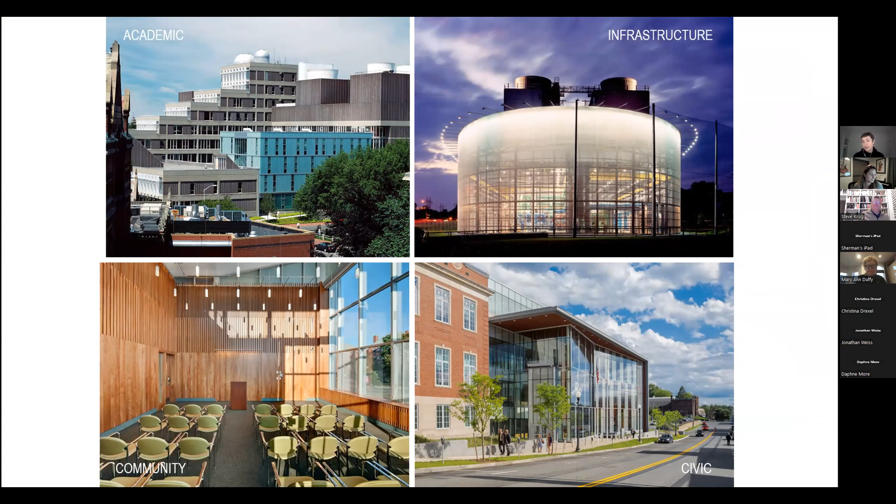I may be preaching to the choir here, but I wanted to go through a brief introduction of why wood, why it matters, and what it does for all of us. You are probably very familiar with this slide, but we know that between building operations and building construction, the building sector is responsible for 40% of our overall energy use.

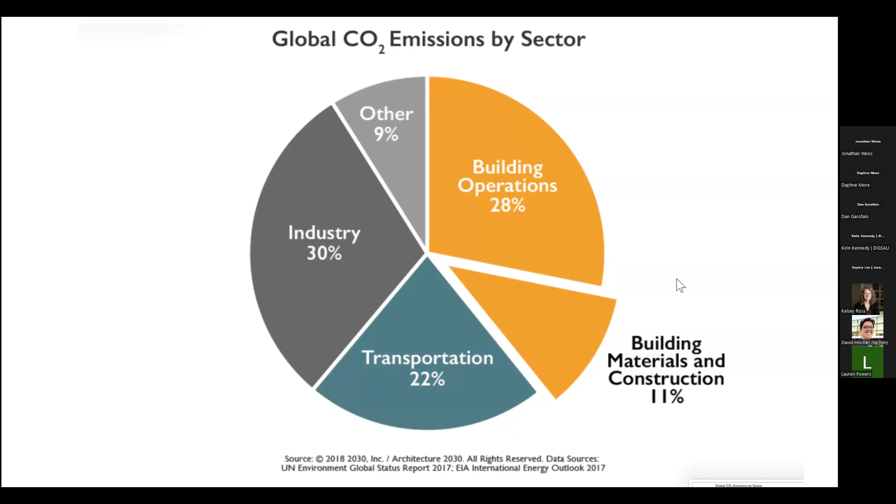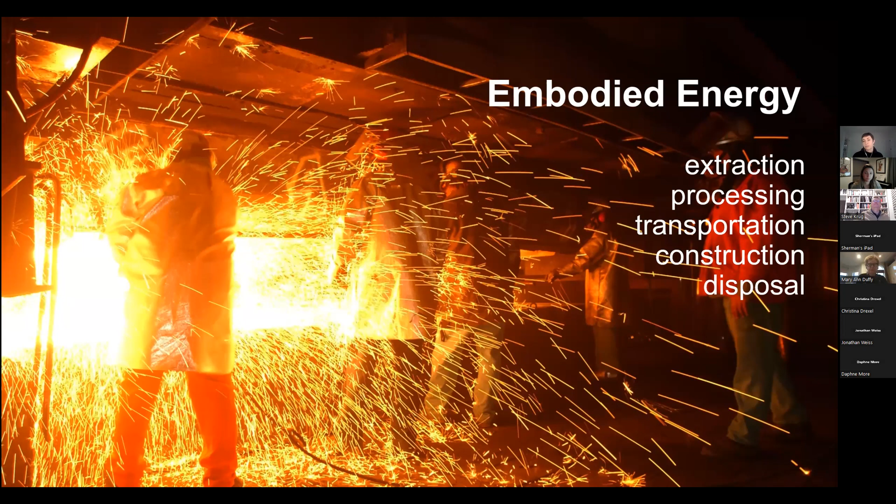And the embodied energy piece of that is 11%. Embodied energy, when we talk about it, refers to all of the energy that goes into the extraction, processing, transportation, construction, and disposal of the materials we use every day in our buildings.

This is probably background knowledge for this group too, but when we talk about the carbon emissions of a typical high-performance commercial building, the energy use itself—the operations—over the lifespan of the building is about 60% of the building's energy use. But the embodied energy, the energy in the materials and construction, is about 40% of that overall energy.

I think when you look at these separated out, it tells one story. But when you really overlay them over time, this is why we need to focus on embodied energy now. Because in these now 8 years before 2030, really 80% of the energy in a building is embodied energy—only 20% of that is operational energy. So right now, in this critical time frame where we still have the ability to change the course of overall global warming, we're really talking about embodied energy in new construction that's going to make the biggest impact.

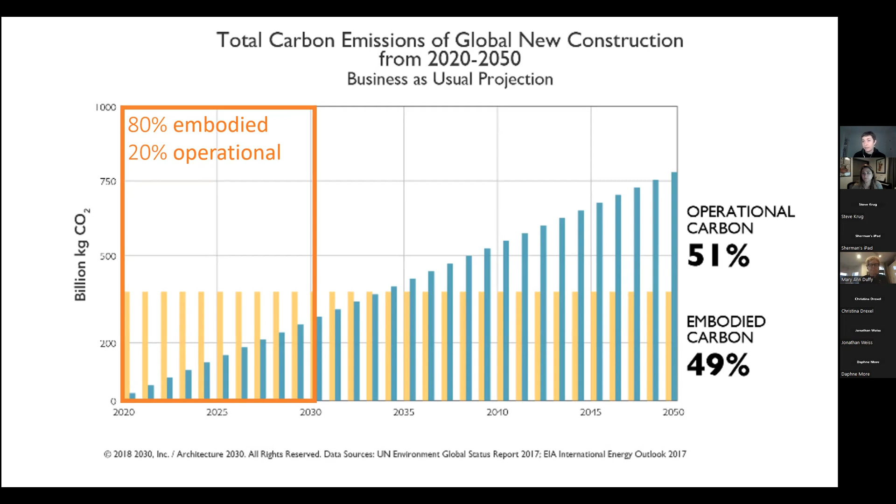Just in broad numbers, looking at three of the most common building materials, concrete, steel, and wood, we know that wood has the lowest embodied energy of those. Steel is 3 times as much, concrete is 5 times as much.

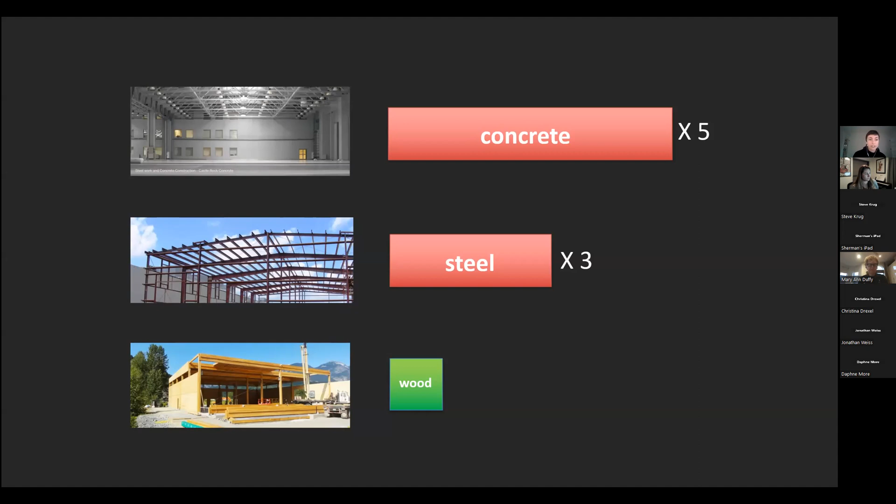So what does that mean, embodied energy? Where does the carbon go? How does it get there? This is a diagram that takes you back to almost 3rd grade, when you learn about transpiration and respiration and how trees are kind of the opposite of human beings. Trees absorb and use carbon dioxide that is stored in their own bodies, and up to 40% of that is in the trunks and branches. So when we harvest that timber and sustainably replant it, 40% of that carbon is really sequestered and taken out of the atmosphere.

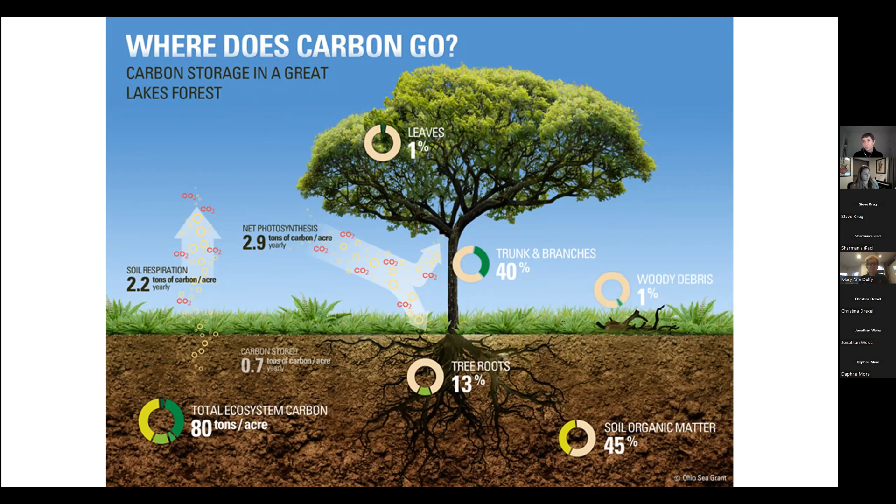I recently taught a really fun studio class where I went with students and followed the entire process of a tree becoming mass timber. I'm going to take you on a little snippet through that.

So you start out with trees in the forest, harvesting them. The next step is the embodied energy of extraction, processing, transportation, construction, disposal that we talked about. But in the case of wood, it's pretty light. It's debarking this tree, and then cutting it into standard 2x or other dimensional lumber.

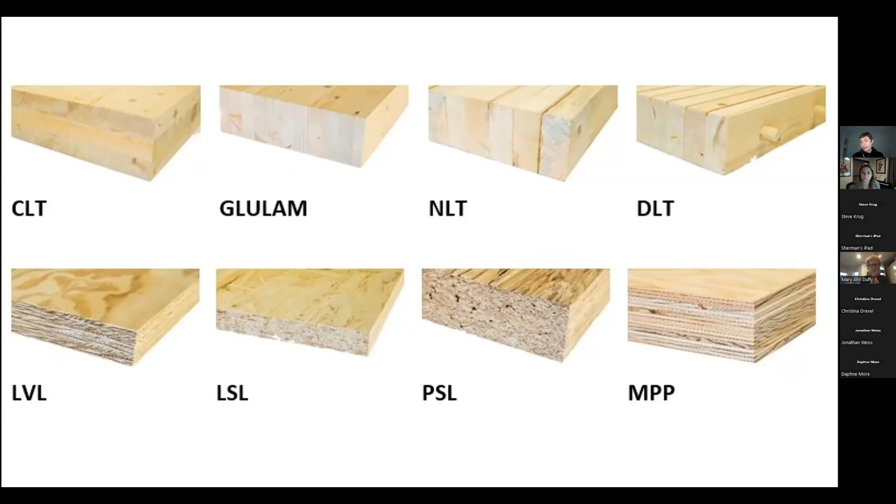There are a lot of different mass timber products: cross-laminated timber, or CLT, which is the one I'm going to focus on today; glulam has been around forever; nail laminated timber, dowel laminated timber, LVLs, LSLs, parallel strand lumber, mass plywood panels. There's a lot of different products out there, and they're actually changing. I added 2 from the last time I gave this same talk. So this is a developing area, and there are some really amazing industrial processes looking for more ways to use smaller lumber more effectively.

So today I'm really going to be focusing on the opportunities in cross-laminated timber, in floor panels, and in shear walls.

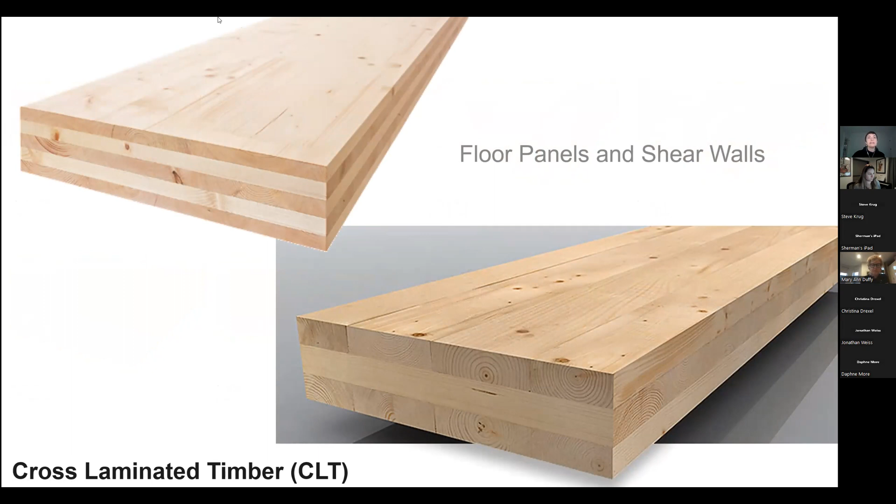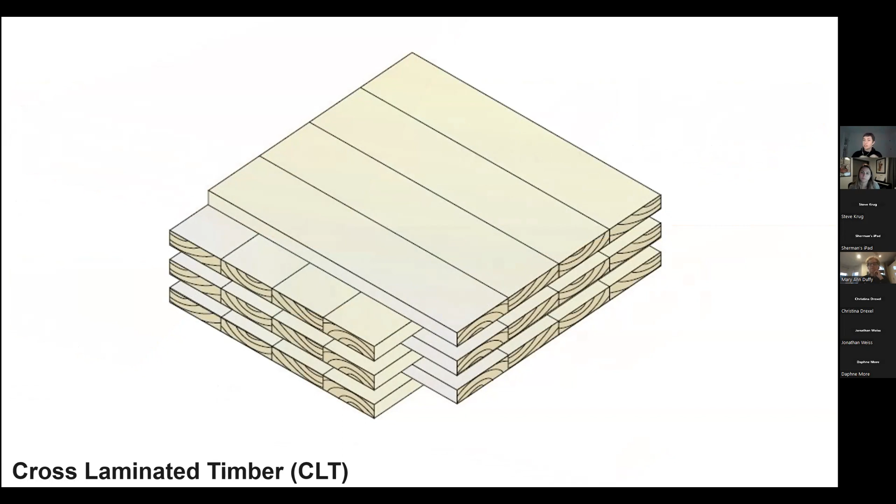Cross-laminated timber, as you probably know, is essentially a process where 2x lumber is laminated together in different layers, facing opposite directions. What's unique about that is it can really span in 2 directions, as opposed to your typical glulam or other lumber, which has a one-way span.

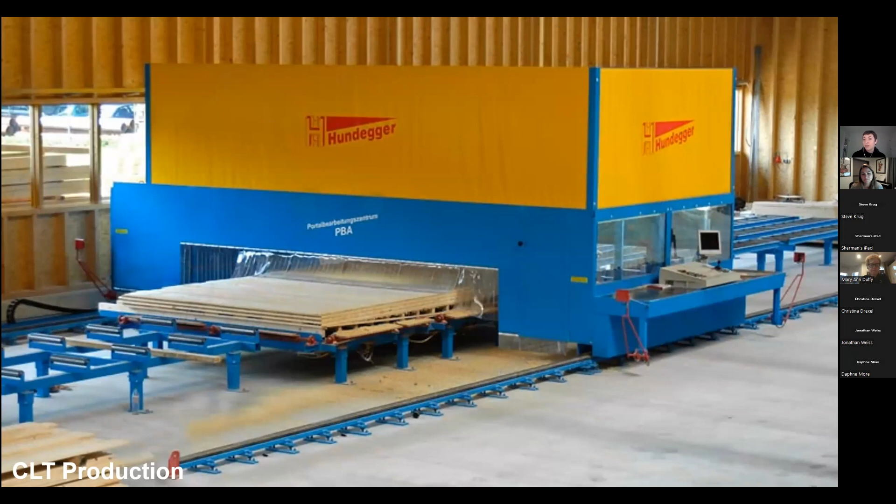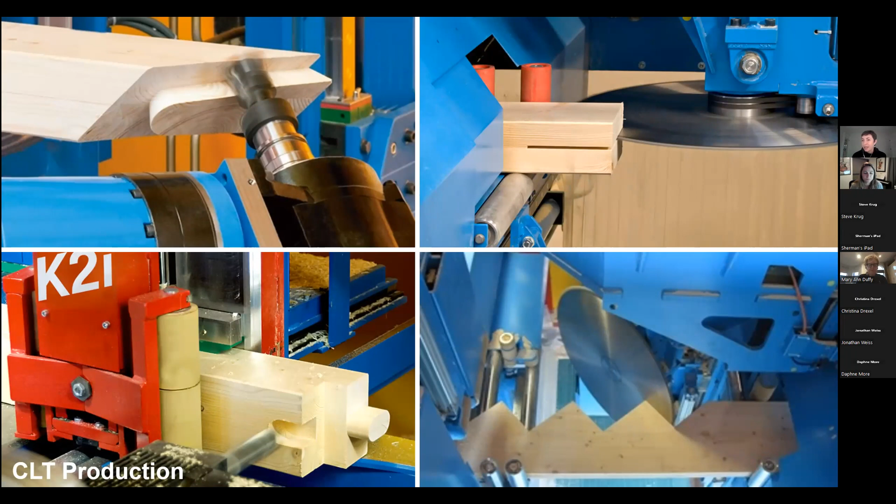Then there's the possibility of using digital manufacturing, digital processing to mill that and customize the shapes and prefabricate a lot of this. So you're seeing here the Hundegger, a 6-axis CNC machine. This can do everything from simple cuts to really complex joints, which is hugely exciting because it translates what you might have learned in middle school shop class, or if you're a carpenter at home, it's the same tools, but applied on a huge scale through a digitized process with incredible precision.

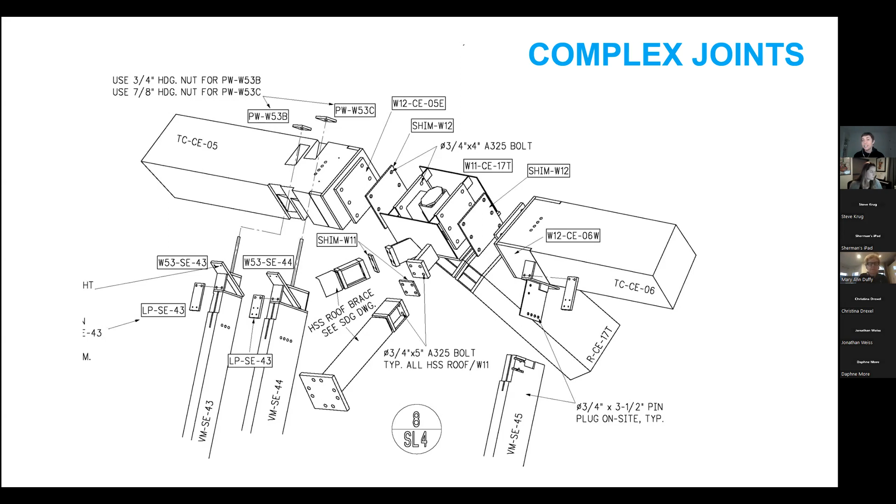So this is almost a cartoon of the complexity of joints you can create through this digitally processed mass timber, something that combines all different shapes of wood with steel plates in between them. It can be used to create complex geometry, such as the Art Gallery of Ontario.

Mass timber can be used in large span structures, like the Olympic Oval from British Columbia. And it can be used increasingly in tall buildings. Another example from the West Coast is Brock Commons, which I think is the tallest mass timber structure in North America at this point, about 18 stories.

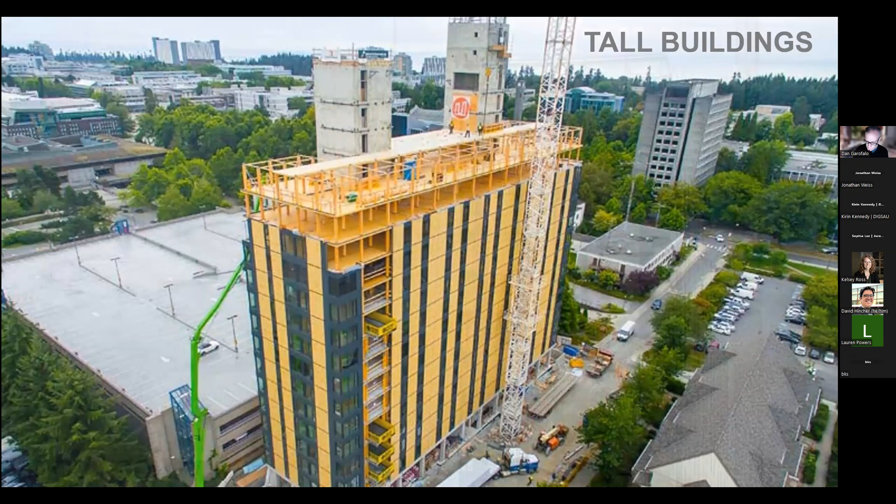One thing we face a lot when talking about mass timber is the fear that wood rots. And that's true, but we know how to protect it. 600 years ago, that meant pulling wood structures back and protecting them with huge overhanging roofs. Today, that might mean encasing that wood inside of glass, making sure it's never directly exposed to the elements.

The fears are also that wood is unpredictable or untested. A lot of this is changing with the new code changes, but that's really just not true anymore.

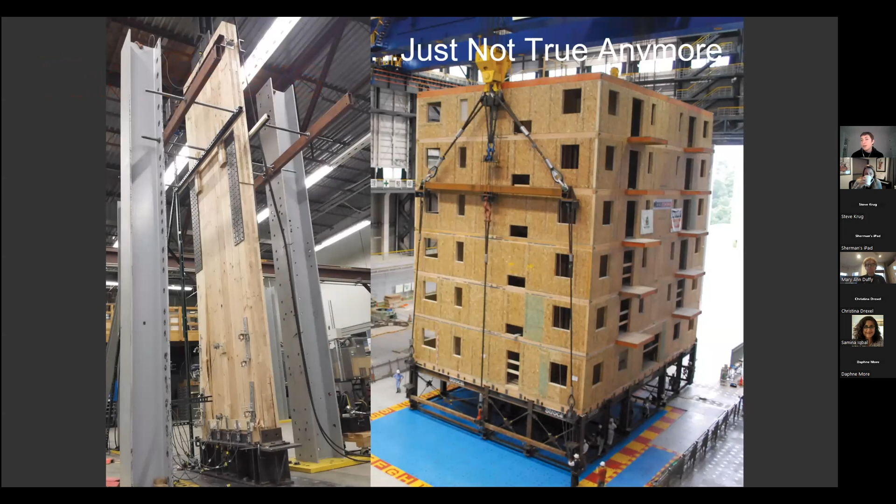This is an example, actually in Japan. You can see this little tiny person here in the corner. This is a full-size mock-up of a 6-story wood building that's being tested on a shake table for seismic. I think because of the lightweightness of wood compared to other forms of construction, you can really build these full-scale mock-ups and test it, not just a teeny sample, but full size in the laboratory on a shake table.

The fears are also that wood burns, which is true, but we know how. One thing that's really interesting is the way the code calculates this idea of a char layer. We know the rate that wood burns, but over the course of burning it develops this protective char layer, which you can almost compare to roasting a marshmallow. You get this outside char, but on the inside the marshmallow is still there. The same thing is true for wood. So when you size a wood member, you're really sizing it for that protective char layer, which is a sacrificial layer, and then the structural layer is there on the inside.

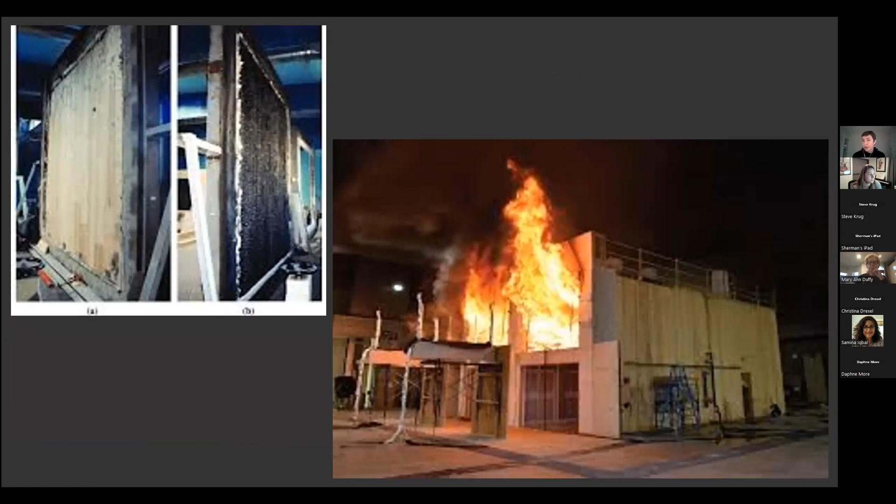And again, there's a lot of testing going on that looks at and confirms the rate of wood burn and how that performs.

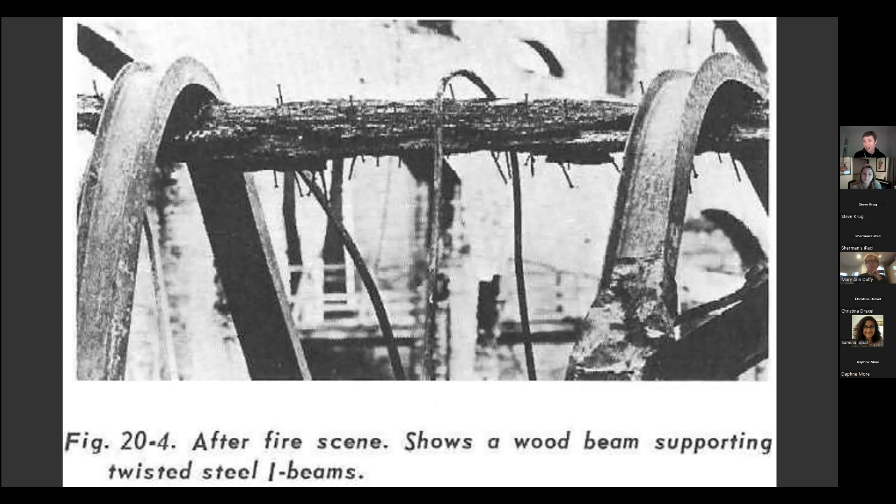So from here, I wanted to go and really look at some of our work, starting with the John W. Olver Design Building at the University of Massachusetts in Amherst. This project, I'm so proud to say, was a national AIA COTE winner. Going through that process was a huge education for me and for our entire practice.

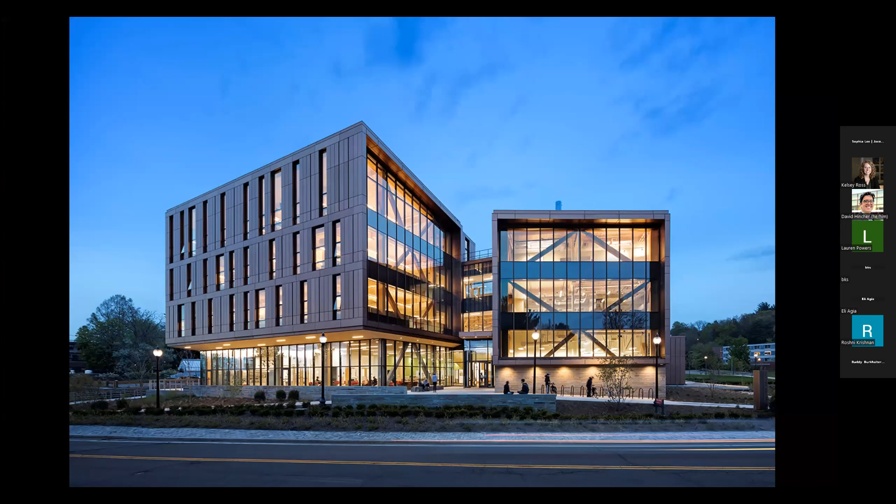This building really brings together three different departments at the University of Massachusetts Amherst: architecture, landscape architecture, and construction technology, and creates a new home for them and harnesses all of their goals.

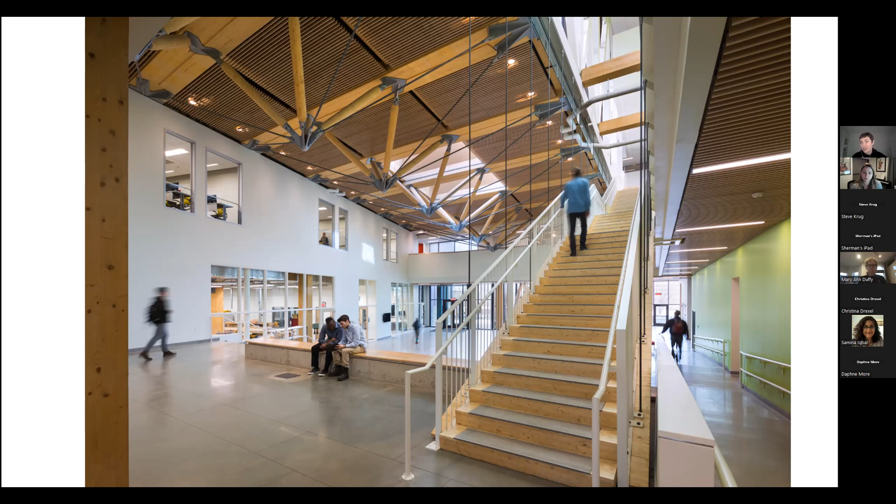This building was actually also able to use CLT as the shear wall cores, and over that a concrete foundation. I think one thing we found in our own work—well, I will say our own work is not totally pure.

We're not building all wood buildings, but we're trying to be thoughtful about the use of materials, and minimize the use of concrete or steel to where they're performing in a way that wood cannot. To focus a bit more on that, the rooftop courtyard and the commons assembly above, let's unpack each of those layers.

You see the intensive green roof that was developed together with the landscape architecture department. It's really used almost as a field classroom for study and planting. That's over a cross-laminated timber panel roof with cast-in-place concrete topping, supported by a glulam beam and perforated metal connector, a composite steel and glulam zipper truss, and then the mass timber structure below.

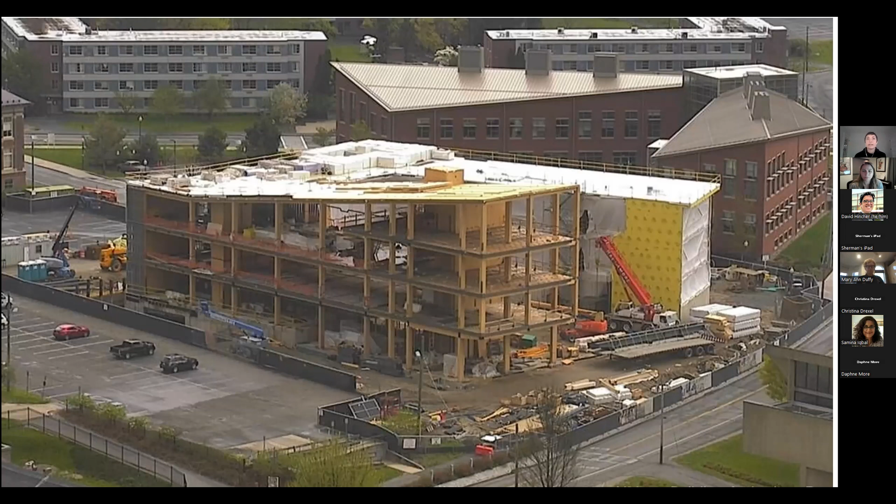A couple more shots from construction here. I'm just seeing all that forming up - that's the CLT floor slabs and roof, and the glulam post and beam structure supporting that. From another angle, and then getting up close here, you're seeing the glulam post and beam, CLT floors, and the CLT shear walls beyond.

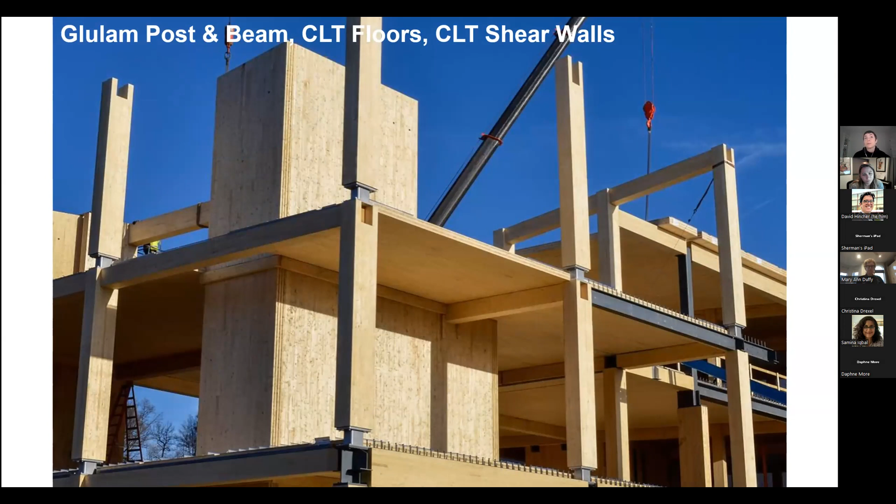So this was, for any code geeks out there, under an earlier version of the code - we didn't have the advantage of the 2021 code for this one. So one thing we had to do was use a variance process to allow, especially for the vertical shear cores. The local fire marshal was very supportive of that.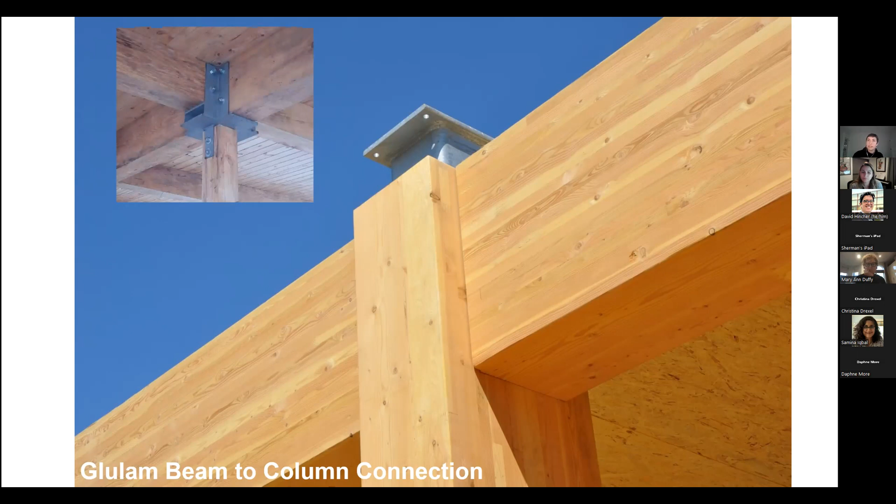Looking more at the glulam beam to column connection, you see that steel collar used at the top of the columns just to support the next one. On the left here, this shows a more clunky set of connections you might see in traditional buildings. What we're really focusing on is using the wood to protect the steel, with this kind of male-female slip hanger - it's very easy to do, you're just dropping that into place, and the wood itself protects that steel connection.

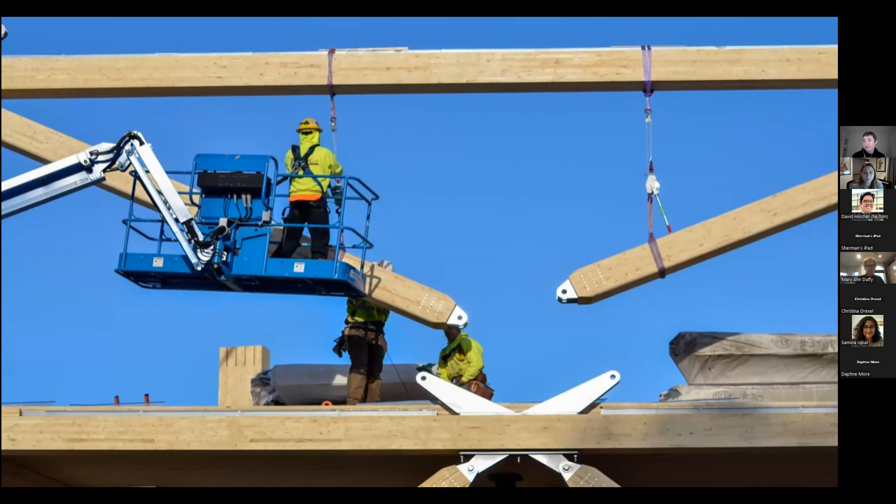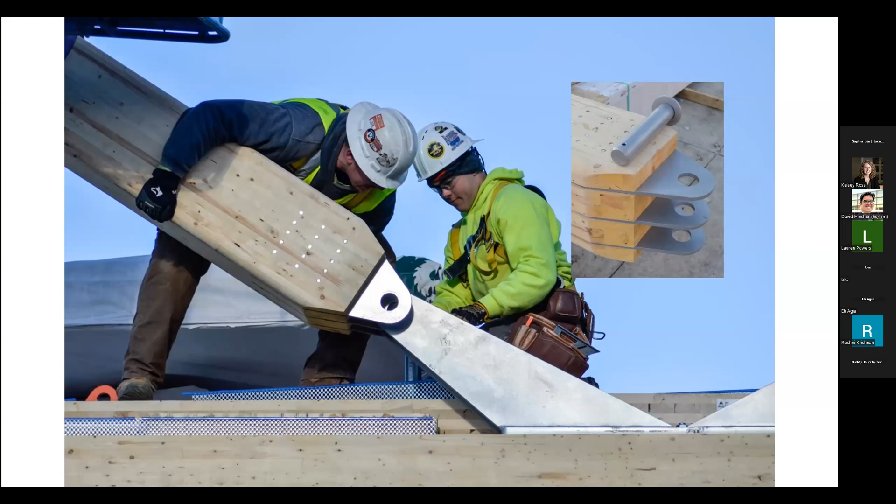Again, the cross bracing and lateral bracing was provided by diagonals and the CLT shear wall cores. This is really where you see some of the power of prefabrication - all of these pieces came to site pre-wrapped, prefabricated. You're seeing the placement of some of that lateral bracing, those diagonal beams, by a small crew - one crane, a guy in the crane, and two guys up there on the deck. There they go, putting the pin in. A really fast and quiet construction process with incredible precision of prefabrication.

Looking more at those CLT shear walls, we used that for lateral support and for the stair and elevator cores. You can see the elevator core coming together on the inside. One thing we were really looking forward to was being able to express and experience that wood inside the stair cores itself.

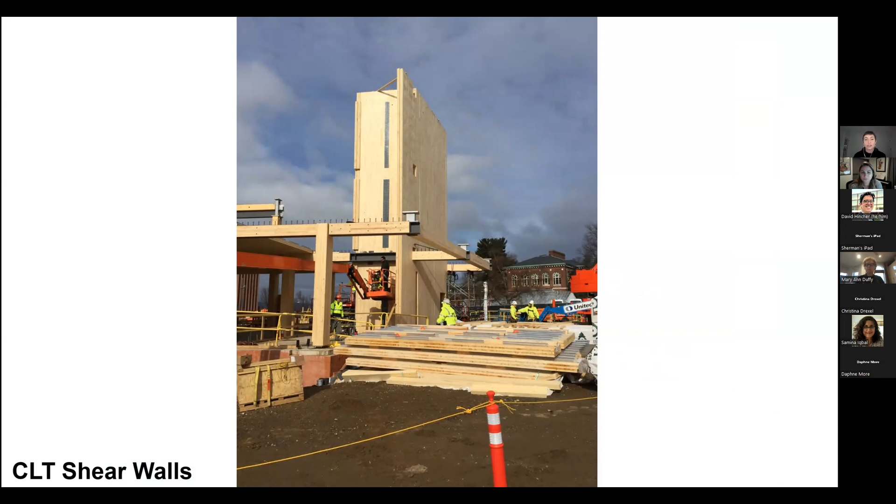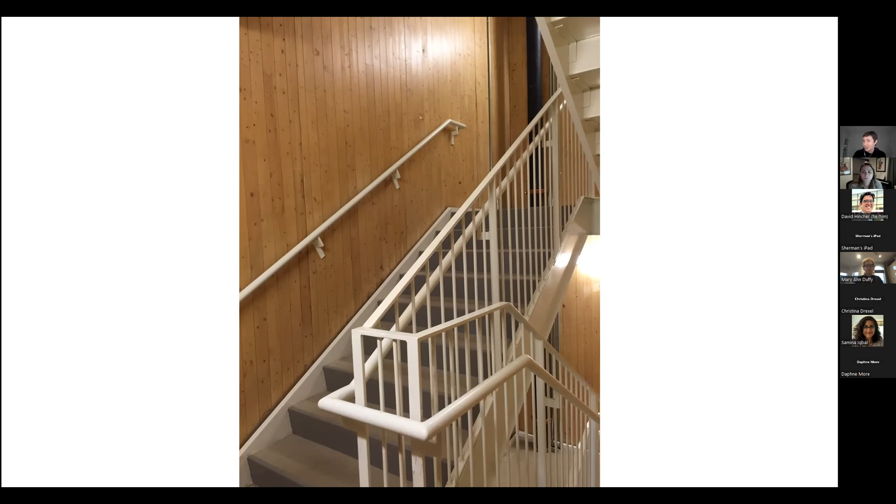That was something we worked carefully on with the fire marshal, because these needed to be 2-hour rated cores, and there were concerns about exposing wood within that system. But what we ultimately did was develop a system with four layers of gyp on the exterior side of the core, which maintained the fire rating, and we were able to expose the wood on the interior of the core. So you get inside and it's a beautiful little woody surprise.

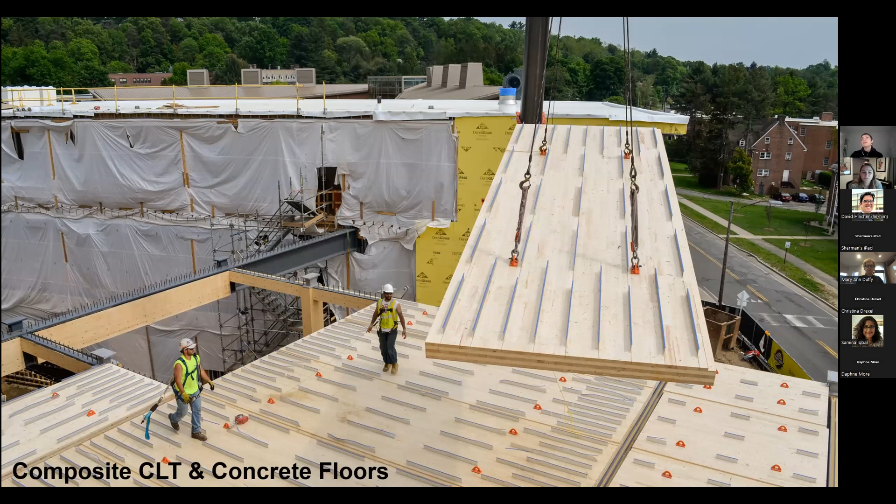Looking a little more closely at the floor panels here, you're seeing a crane lifting an 8 by 40 foot CLT, a 5-ply CLT floor panel, into place. You see on top these lines of something - here's a little detail of that.

We worked carefully with the materials research happening at UMass. One thing they were looking at was a composite system combining CLT slab with a layer of insulation, a perforated metal connector, and a concrete topping to increase the base span CLT could accommodate. This was important in studio spaces where we needed a more open span. It was amazing to work directly with the university and put some of their research into practice on this project.

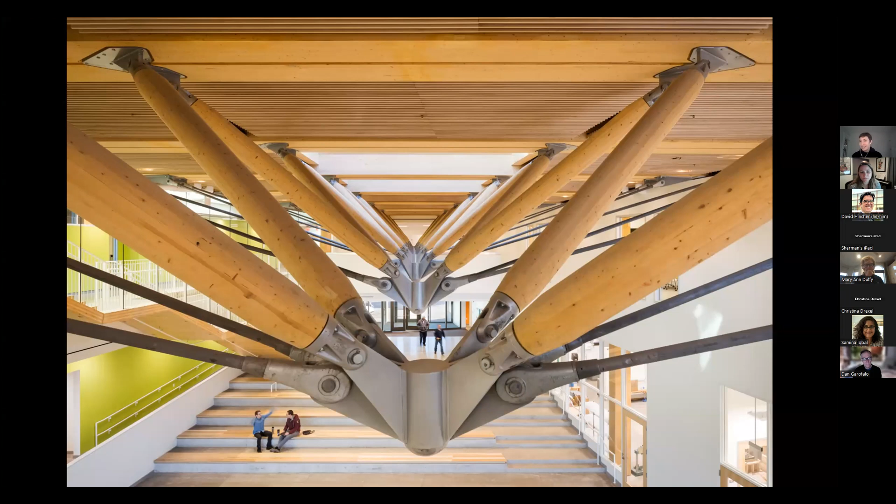The CLT roof deck, and then looking more at the zipper truss, which is really the main visual feature of this atrium space. It's also the one that brings together the work happening in the building. This highlights some of the challenge.

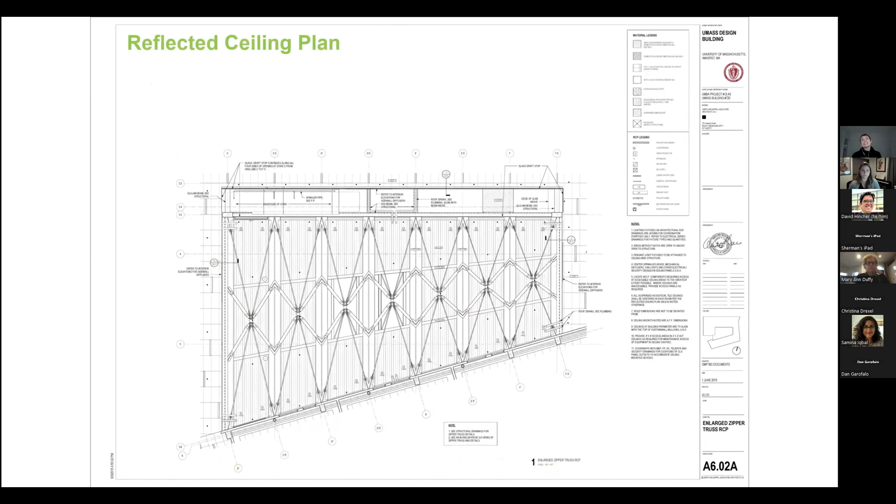We worked together - really a back and forth between architecture and structural engineering - to design this zipper truss, which basically uses wood members largely in compression, and light steel members in tension all the way down. This is a three-dimensional solution that combines steel with wood expressed in unusual ways.

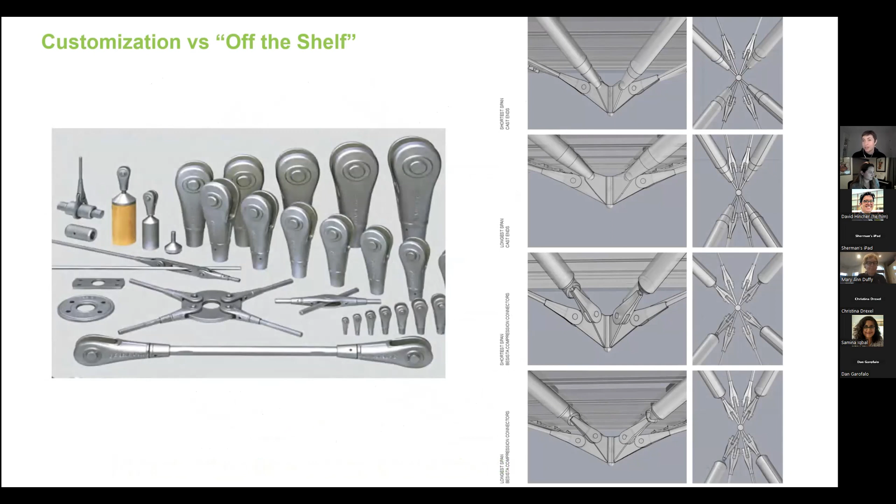You might say this is a hugely expensive custom fabrication, but we really thought about the cost impact too, and looked toward as many off-the-shelf parts as possible. After working a lot with the structural engineer, there were very few cast pieces - basically a single cast connector piece - and we were able to use off-the-shelf components for all the attachments, making this a cost-effective and structurally effective system.

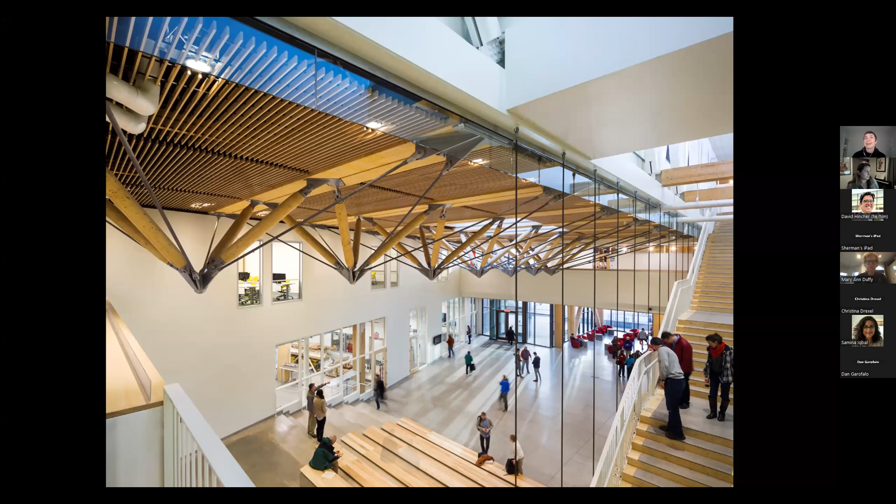Just one look at the connector, and then to take you back out - this is the final realization of that central common space, with the skylights coming down through the wood truss, and the CLT stair on the side. That ends up being such an important and amazing visual connector for all the different levels.

One thing that was initially a concern of the university was how to protect the wood - would students write on it, sign their names on it? What we found is that doesn't really happen. People do want to reach out and touch the wood.

They want to smell the wood, actually. When they moved into the building, one of the best pieces of feedback we got was that it doesn't have that new car smell - it actually smells like a forest. So the wood has a bigger impact than you'd even imagine.

But people are really protective of it, and even though you can reach out and touch these trusses, there hasn't been any problem with students or anyone damaging them. This is a look at the studio spaces here.

This is again where we're really expressing that post and beam system of the glulams, with the CLT roof deck above. This highlights a couple of issues in architecture you can ignore if you're putting acoustic ceiling tiles everywhere, but you can't if you're trying to expose structure and make it a visual part of the experience.

You see some of the careful coordination between electrical conduit serving the lighting up above - look at those sprinkler pipes. There are interesting challenges with exposed structure that really open up and make you focus on that reflected ceiling plan a bit more.

This is just a look again on the ground floor, the views out back to the commons, but this is the digital fabrication lab where they actually do on-site testing of, among other things, some wood structures and composites.

Even in the offices and smaller rooms, we tried as much as possible to expose that CLT deck as the ceiling, which has a couple of benefits. It reduces finishes, it reduces costs, and it brings that biophilic nature of wood structure as part of every single space. And that's true in the ground level cafe as well.

And this is just a view up of the roof deck above. That skylight you're seeing kind of penetrates through to the atrium space below, and just kind of the depth and density of planting that this supports.

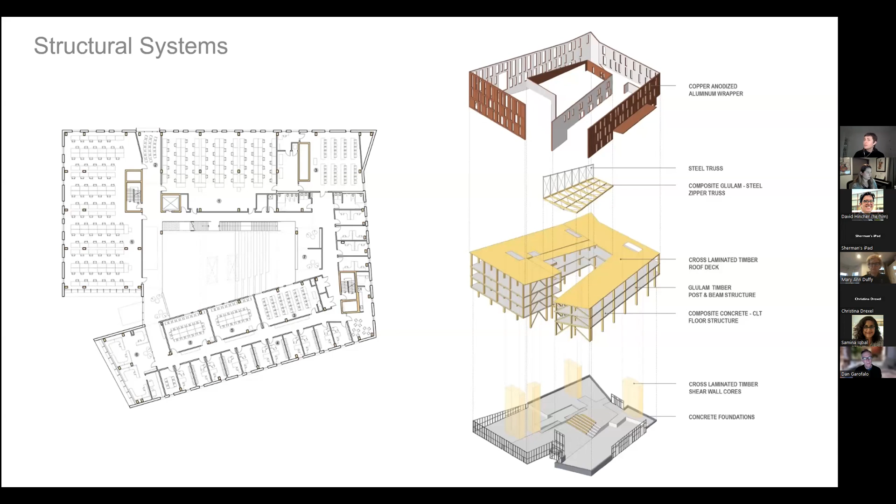I wanted to go back, I'd earlier introduced this as, oh, this is the structural system. But quick confession is that this building was actually originally designed in steel. We were about 25% through DD when one of the members of the steering committee at UMass Amherst said, well, couldn't this be in wood? And I think really a huge part of the success of the building, the collaboration between architect and owner, was that everyone said, well, maybe it could be, and took a pause then and really studied it.

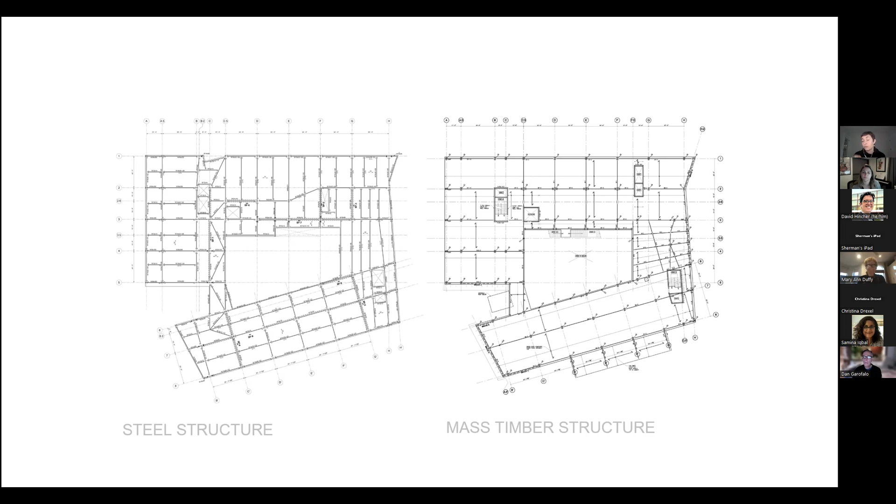So on the left hand here, you're seeing the original steel structure. On the right hand, you're seeing the mass timber structure. But the fact that we were at 25% DD in both systems in parallel allowed us to do some really interesting testing and evaluation of what was the embodied carbon impact of this. This isn't just theoretical, what if this building were in steel versus what if it were in wood. We actually had documents for both of those systems at a pretty good level of detail.

So we, together with Woodworks, used this as a test case. There was a whole building LCA that looked at, again, you're probably very familiar with this, but the first time I saw this kind of LCA diagram, I was like, what am I looking at? This is basically just showing what the boundary is of the life cycle assessment. So this included from the product stage, raw material supply, transport, manufacturing, from the construction process stage. This is really the building on site, the transport, the construction installation process, use, maintenance, repair, replacement, operational energy, and operational water. And then also some of the end of life stage, what this would take to demolish or deconstruct this, waste processing and disposal. So all of that energy was considered as part of this life cycle assessment.

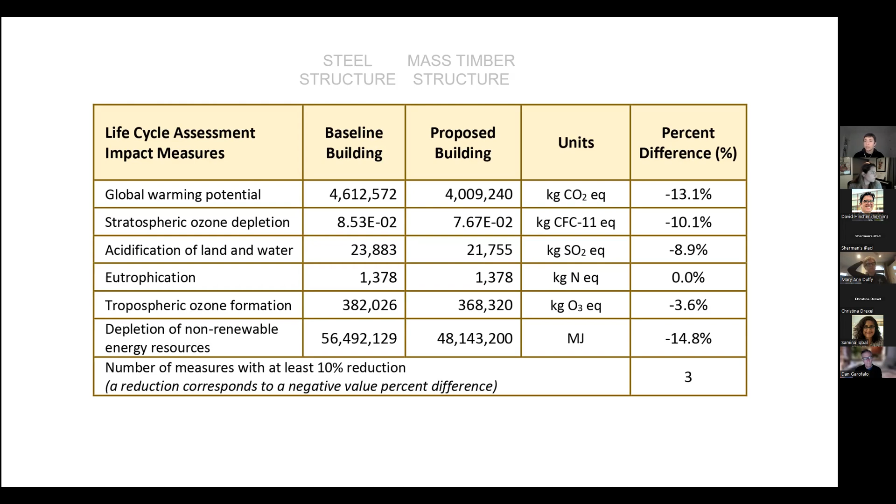And these are the results. You see the baseline building, which in this case, again, is not theoretical. This is from the 25% DD documents versus the mass timber structure. And I think the key thing to focus on here is just the global warming potential, so the kilograms of carbon. This is a 13% reduction by going to mass timber without making huge other changes. So this was for us a really important and really validating study, and one that we were excited to participate with Woodworks and with Athena at the national level to look at this and understand what this really means.

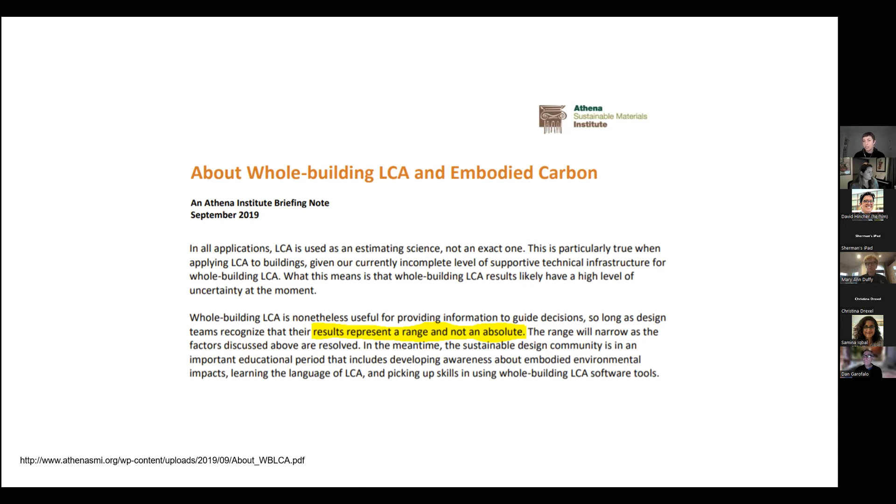I would also just give a warning about life cycle assessments and embodied carbon. This is from Athena's white paper, but thinking about an LCA, you kind of have to have both of these. Like, what are you comparing this to? Because the results represent a range and not an absolute. So we have a really hard time saying, okay, how many tons of carbon per square foot is this building? It's much, I think, more accurate to consider it as, what is the reduction, and compared to what?

And then finally, just a plug for the COTE Top 10 Super Spreadsheet, which is an incredible tool provided by national level COTE AIA. It kind of helps you think about how you establish a baseline for embodied energy, what you're talking about, and how that might differ by building type. So I think for all of these, this is just a way to frame our own heads, saying, okay, I'm not necessarily aiming for like 42 pounds of carbon per square foot, but I'm trying to think about, okay, if this is an educational building, what might a low embodied carbon look like?

What might a high embodied carbon look like, and how can I help shift that conversation towards lower embodied carbon? The embodied carbon story here was just part of a much bigger story of huge efforts to think about embodied carbon, operational carbon, long-term maintenance and durability on this project. We really highlighted the embodied carbon piece in our COTE application, but operational carbon was a huge part of the dialogue and conversation as well. This project ended up being two points away from LEED Platinum, but came in as a LEED Gold project.

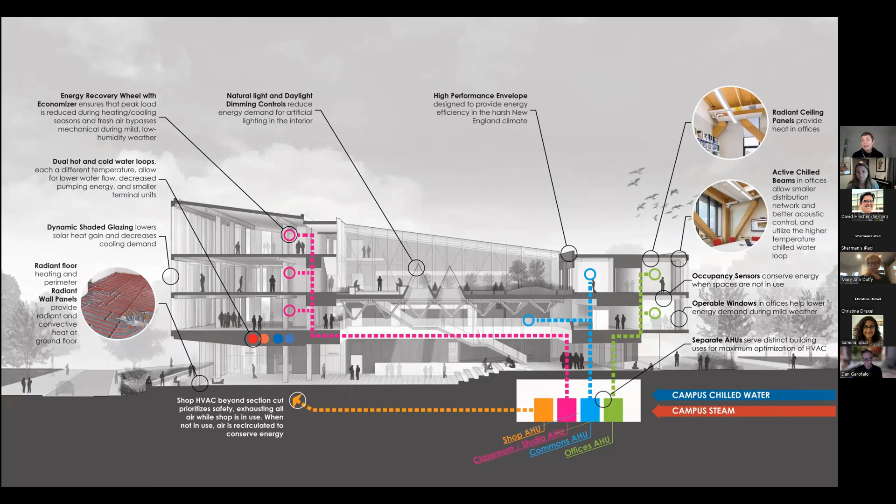The next project I wanted to look at was Adohi Hall at the University of Arkansas.

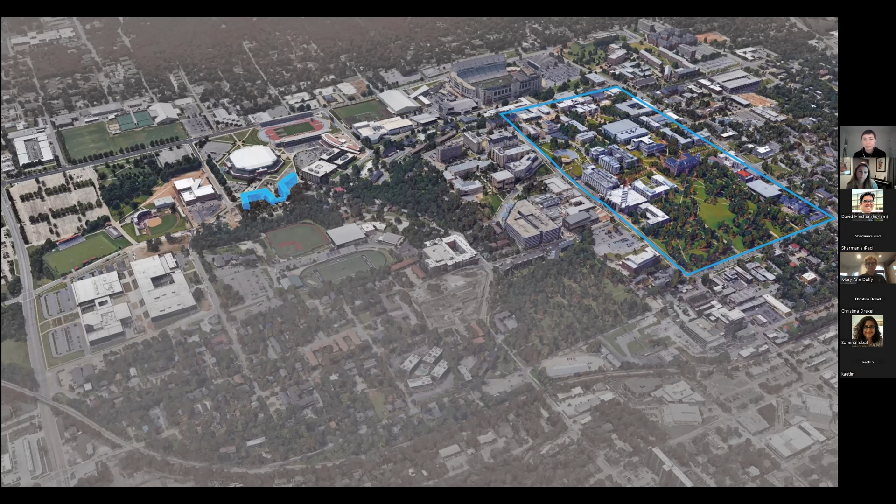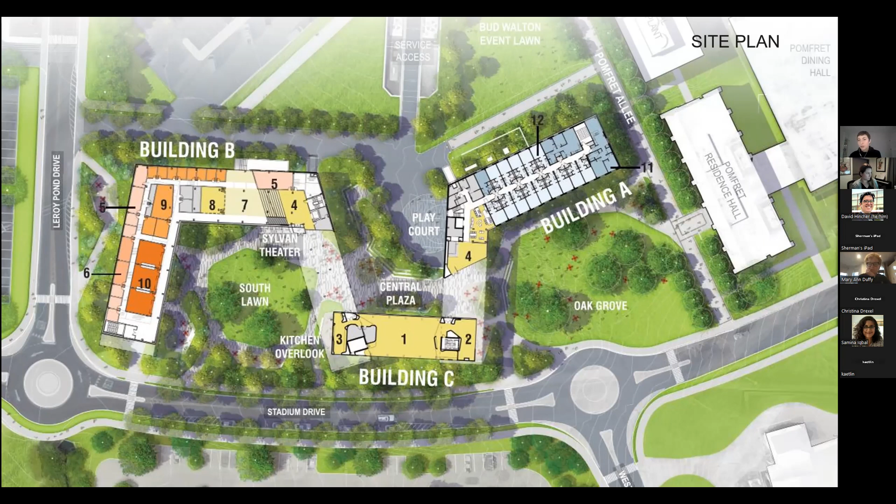Up above, you can see that relentless module of the residences, and we also tried to break that up and create social spaces at the ends of the building, at the major points of circulation by the elevator and social stair.

This project used, again, a glulam post and beam frame and CLT floor slabs and roof slabs.

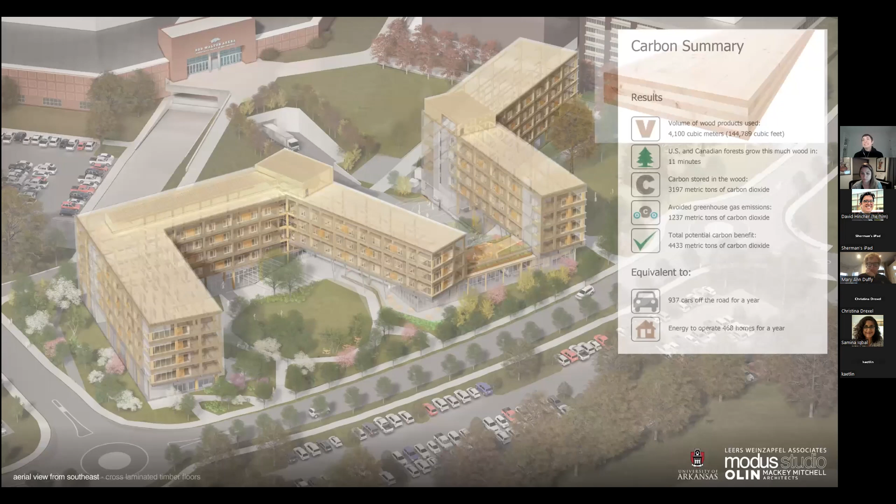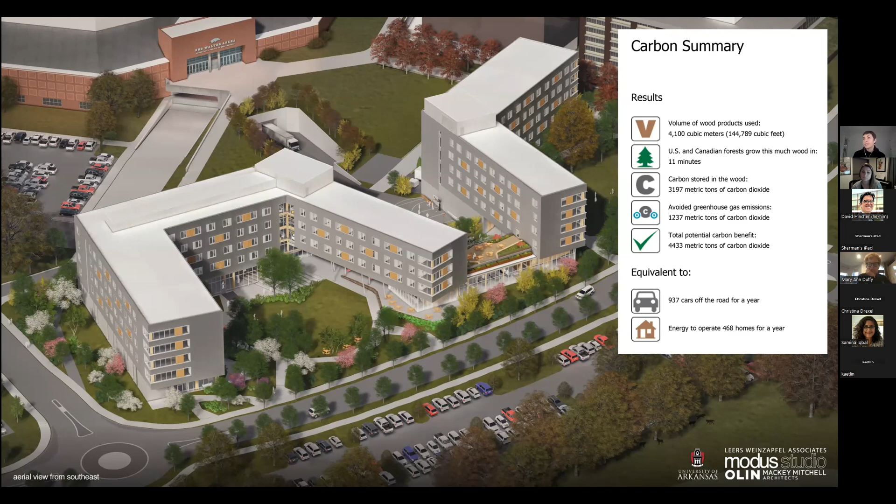And again, this is just that same Woodworks overall carbon estimator, which is a great early way to check and say, okay, if I'm using mass timber, if I'm using wood structure, how do I think about this, and how do I explain this to owners or clients? It's equivalent to 937 cars off the road for a year.

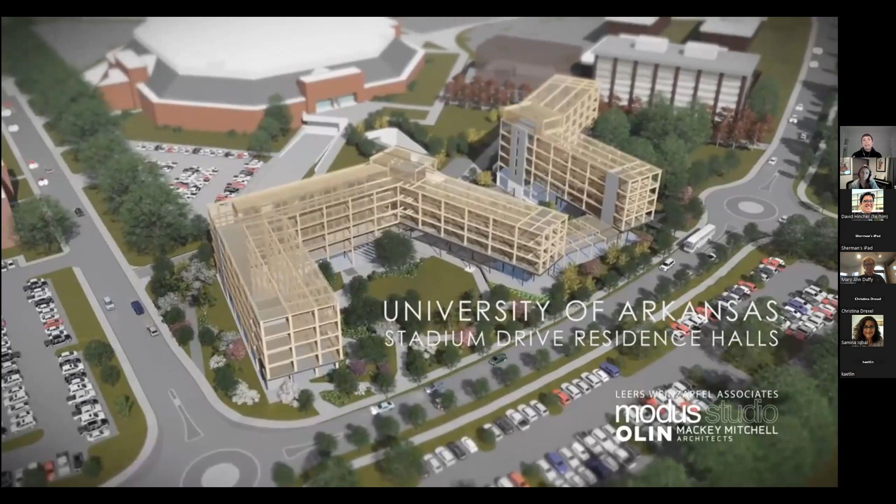This was a brief animation we put together which really looks at that structure. So you can see, again, the glulam frame. You can see the CLT floor slabs and roof slabs. You can also see here some places where we were bringing in steel at strategic locations. So at the longer spans underneath the bridges, we were using steel there to help support those. And also in this building, the stair cores and elevator cores were cast-in-place concrete.

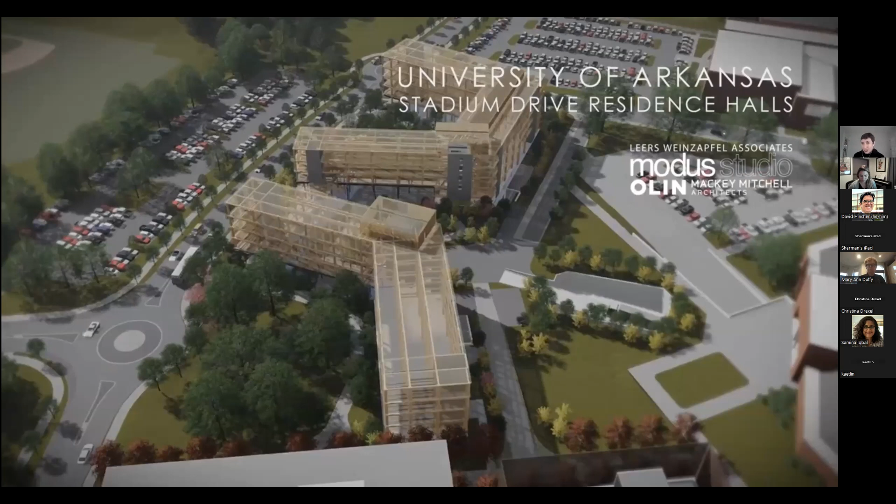That really was due to two factors. Number one, in this case, we had a really conservative fire marshal who said, absolutely, over my dead body, are you going to build a shaft out of anything other than concrete. The other one was that we ended up putting some of the mechanical units, the overall ERV for the building, on top of that elevator shaft, which causes a lot of vibration. Wood does transmit vibration more easily than other building materials, so we were able to use that strategically to help minimize vibration impact for the overall building by balancing it on top of the concrete elevator core.

Here's a brief tour through the building as we move from north to south. As you're approaching from campus, you enter first into a stand of basically preserved trees of white oak grove. And you can see how the typical student residence floors are lifted up above the ground floor to create a continuous passage from north to south.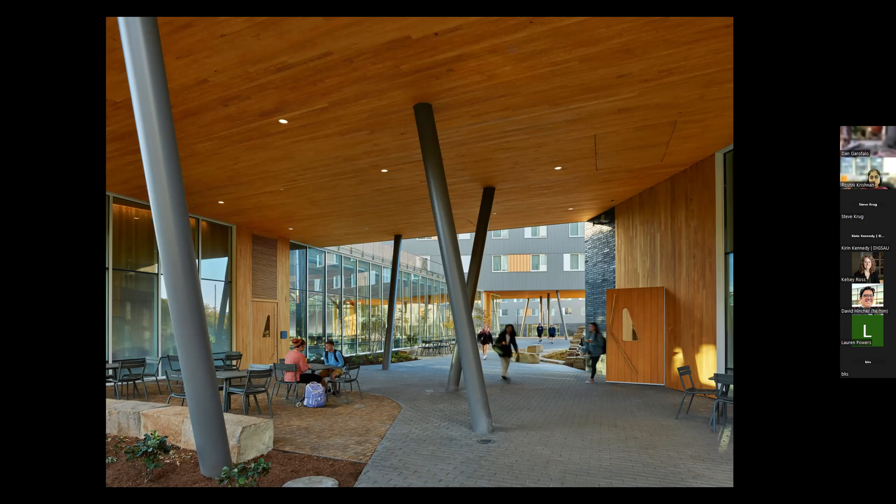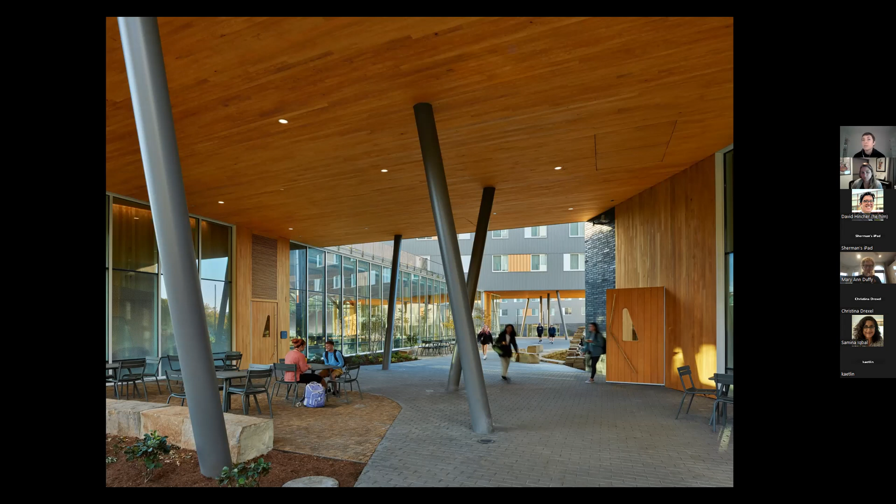Here you're moving underneath these breezeways, these bridges up above. And we were using, in this case, Binderholz CLT. We had really hoped to be able to use locally fabricated CLT, but the market wasn't there yet, so this is actually European CLT. I kind of think about it like the banana versus the spring green - slow boat transportation is still relatively carbon effective, even if you're bringing that from a long distance away. But anyway, so Binderholz CLT, but we also tried to use Arkansas cypress, essentially local finish wood where we could, to make the wood as visible as possible and supplement with local, native materials whenever we could.

Moving here into that central courtyard space, you're seeing the cabin right beyond. As I said, this is the central social space of the entire complex. We have exposed CLT roof planks there, we have glulam beams, and again a glulam queen truss here that uses steel strategically to support a longer span, and a green roof up above.

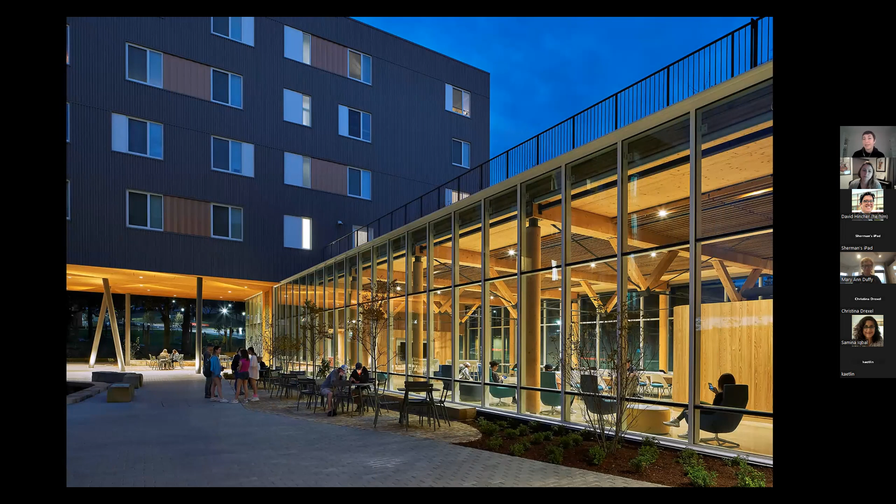Just to take you through here in the cabin, and then moving you down the stairs through the performance space, that kind of inside-outside connection, and down into some of the workshop spaces to the south. One thing that was really interesting on this project is, number one, we worked really hard to keep that exposed CLT floor on the ceiling, and really be thoughtful about coordination with mechanical and electrical. The other one here, on the right-hand side, you're seeing into the workshops - we were able to repurpose the CLT skids, which are actually used almost like a transport mechanism for the CLT, and use that on site to create custom tables and furniture.

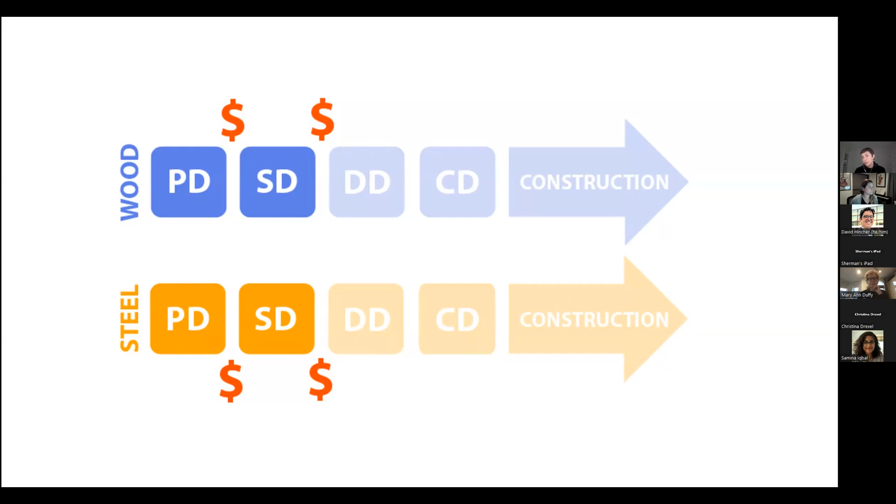To zoom on through, again a key challenge here was the cost. So one thing that we did is we kept wood and steel on the table through schematic design, so we were able to really show how to use that effectively and understand what, if any, cost premium there was. Looking at the module was, I think, one of the critical pieces here, in a really modular student building. This shows two student rooms and how that lays out into a bay, and how we were able to think about that in terms of using the 8x40 CLT panel so that everything was used as effectively as possible.

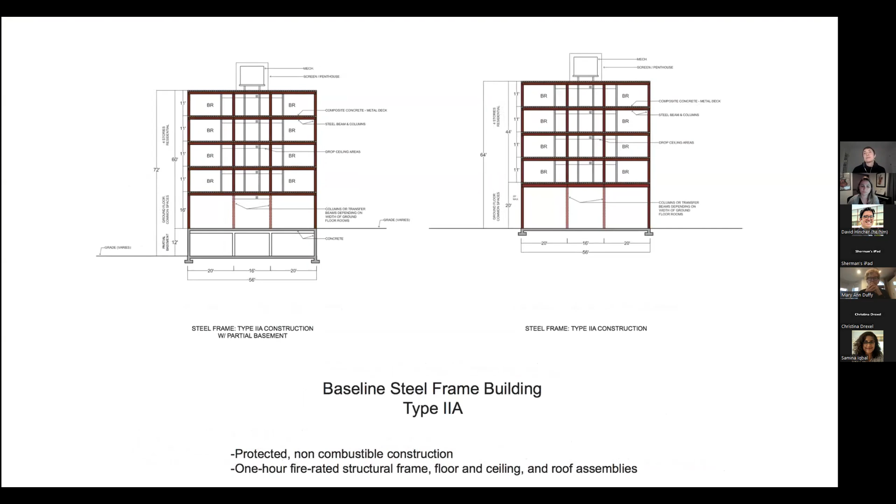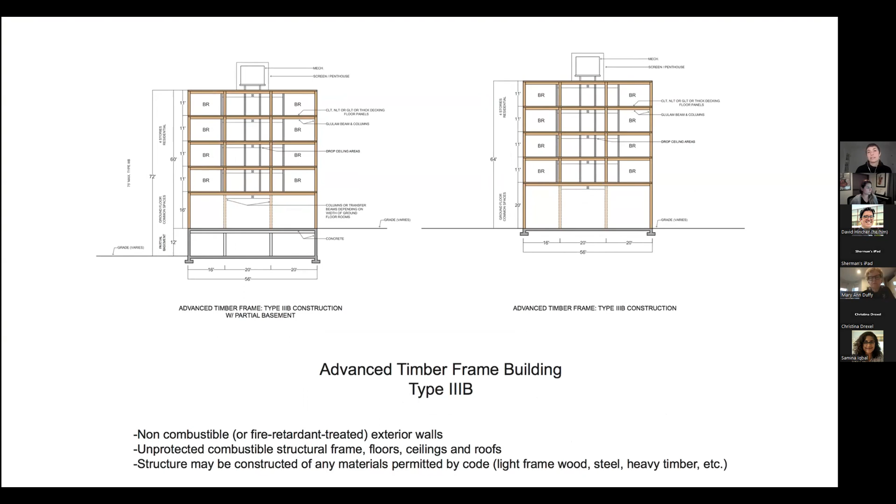I'm going to zoom through here. We talked a little bit before about our local fire marshal, but I think, again, making sure that we're able to translate - okay, this is the baseline steel frame building type 2A, and then this is what the building looks like in advanced timber building in type 3B.

Non-combustible exterior walls, but unprotected and combustible frame. One thing I also wanted to highlight were a couple of challenges we found during the design assist and fabrication process. One of my takeaways in this project is, when you size a steel beam, your W12 is a W12 forever and ever. Our basis design was a Douglas fir glulam, 14 1/4 inches by 18 inches.

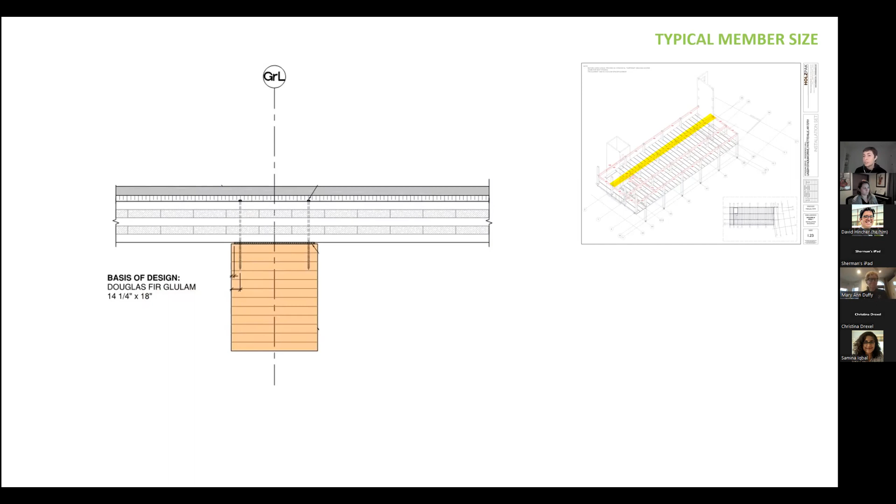But when we ended up selecting our mass timber supplier, this was Binderholz spruce pine fir. It's a different tree, with different inherent strengths, as well as an overlay of European versus North American structural standards. So some of those beams got a lot deeper, which was a problem, specifically in some of these toilet room locations. But that was a real learning process for me.

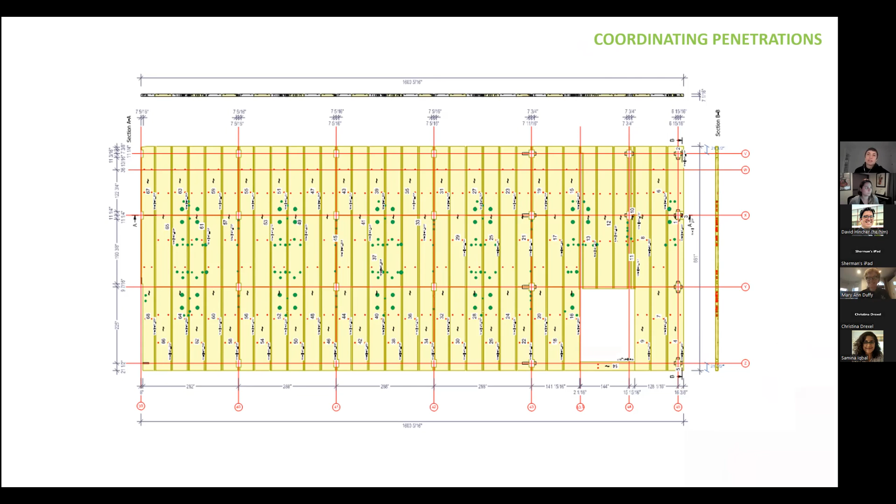Our contractor called this the Swiss cheese slab, but it represented huge savings in the field. Just a couple of construction shots here.

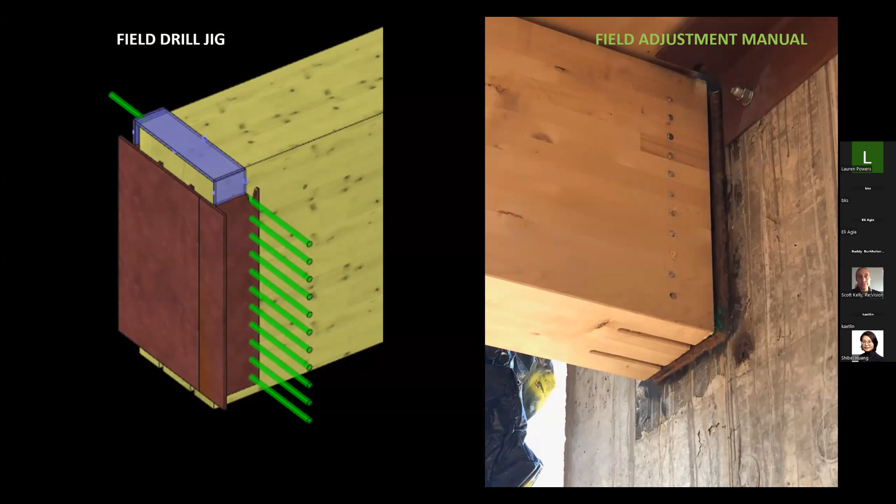And then the last thing to highlight was that we actually had some challenges with the field tolerances of the concrete. So we had to work together and back off of that prefabrication in one key location where the timber met that concrete core, so we could size that on site and address each of those individual field conditions for construction tolerance.

So this is just the construction process, but I will stop here. Thank you all so much for having me today. If you have any questions, please jump in while you still have a few seconds left.

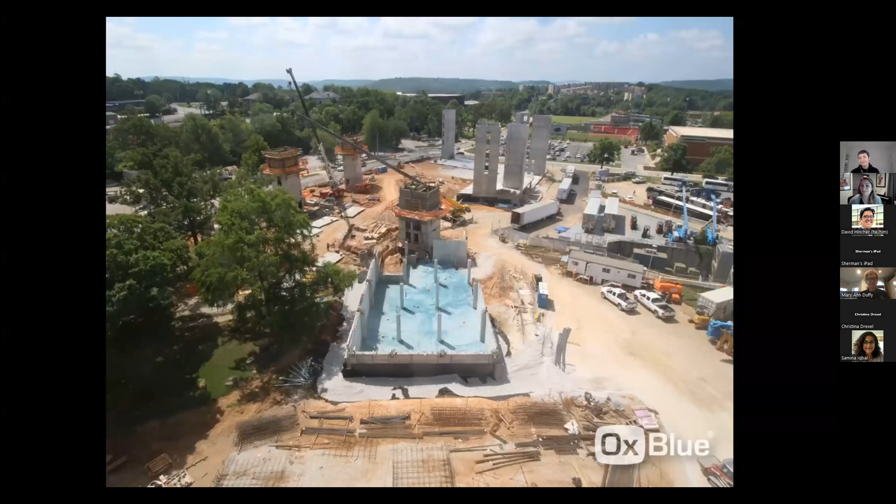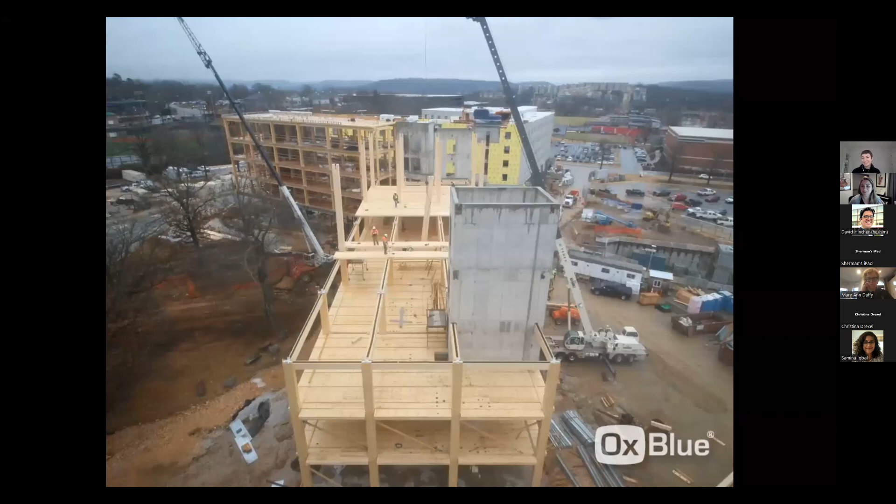But thank you so much, Ashley, for being here today. This is really insightful and motivating. It's always kind of far off to see projects like this, but to see it happening on a regular basis in such a feasible way is incredibly motivating and something we want to help promote. Thank you again. Me too. Thank you so much for having me.

Great. And for everyone else on the call, I did want to mention - I don't know if anyone attended AIA Forum this year, but COTE hosted an event that highlighted the Amy Gutmann Hall in Philadelphia. It's a 6-story mass timber building. And Gensler provided a study during that presentation, which we're working to try to make a little bit more public, but they provided a study that actually encouraged the feasibility of mass timber from a cost neutral perspective.

It was a little bit of sort of design build efforts on their end to make that happen. It's such a new project type in Philadelphia, but that's exciting to see in contrast to most contractors that we're working with in Philadelphia saying that there's a cost add for this type of construction. Just a little tidbit there for everybody.